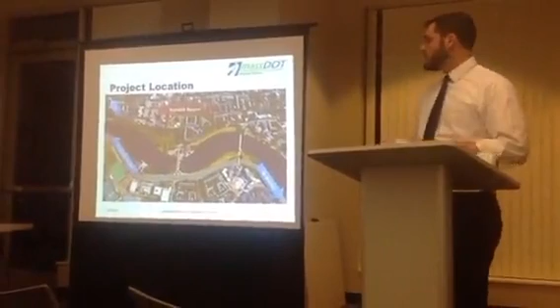So, where are we? This is an aerial view of the project location. This is Soldiers Field Road on the Boston side, and of course here's Harvard Square over in Cambridge. And this is the Anderson Memorial Bridge, which I'm sure you're all uncomfortably familiar with, is under construction today, and it seems like it has been for quite some time.

Just as a point of clarity, when we first began looking at this, the feasibility of an underpass at Anderson, we started doing it actually back in 2010 as part of the rehabilitation project. At that time, we determined that based on the extended environmental and historic review periods associated with modifying our rehabilitation plan, we deferred an underpass or a boardwalk alternative to the future. And that's where we are. That's why we're here today.

This is the future, as it were. And I remember, I'm sure all of you saw on your Facebook feeds yesterday, the Back to the Future frenzy. Yesterday was the day that they went to, and it's quite a different future than I think Hollywood envisioned. That was driving me nuts. Don't put that one in the minutes.

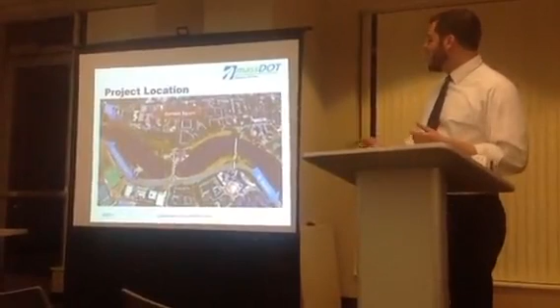A little older now. So you know, this is to Watertown, this is to Boston, Soldiers Field Road, and what we're talking about is separating by building a spur path that would make it so that bicyclists and pedestrians wouldn't have to cross at grade at the North Harvard Street intersection here, and you'll see a whole lot more detail about that.

We're evaluating a set of alternatives for separating what currently exists and what we have proposed under the rehabilitation project, to remove the vehicular and bicycle/pedestrian interaction by putting bicyclists and pedestrians on the spur path below grade, much closer to the river.

In doing this, we're hoping to enhance the recreational use of the Charles River Reservation, better accommodate bicyclists and pedestrians, and provide an uninterrupted path facility at this particular location, and address the safety, accessibility, and congestion concerns that we've been hearing from path users for years, ever since we kicked off the Anderson Rehabilitation Project's development.

We're doing that by evaluating 3 alternatives. We'll discuss—Paul will get into a fairly rigorous description of them later. We'll select the preferred alternative and advance that into our historic consultation process under the State Historic Preservation Law with the Mass Historic Commission, and initiate other environmental permitting requirements as determined by which alternative we select, and then advance through preliminary design.

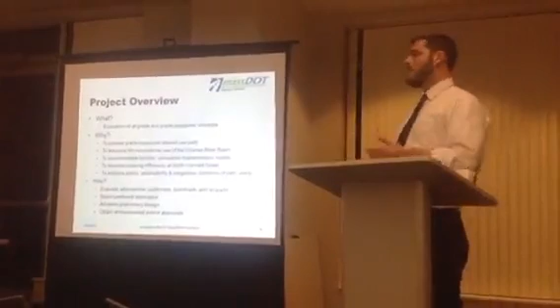Ultimately, the project would get to a preliminary design and then a final design, and then we'd seek funding for construction if that is the ultimate outcome. At this time, I'll be clear, that outcome is not necessarily set in stone. So right now we're really at a preliminary planning phase.

We're looking at the feasibility of two grade-separated alternatives. We're looking at how those compare to the future existing condition associated with the improvements that we propose as part of the rehabilitation project. Like I said, we'll select the preferred alternative and then advance it later. But tonight we just want to have that initial preliminary planning level discussion.

There's been a huge amount of interest in providing a grade separated facility, most notably in the form of an underpass or a tunnel through the bridge structure. This is something we've heard about for years from many organizations in the metro area. Most notably, the Charles River Conservancy has been advocating for this for many years, along with a coalition of other groups, local stakeholders, and residents interested in MassDOT looking at this. This is really just beginning again tonight.

We looked at this in 2010 as part of the Anderson project's development, and we dismissed it then as a matter of chronology and funding. We didn't want to jeopardize the full larger rehabilitation project with this proposal. Now that we've been able to separate those two, we have a little more time and comfort to take a second look at it.

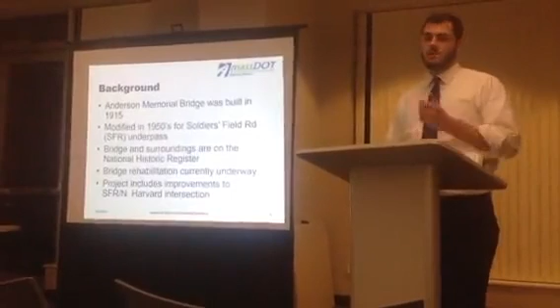The Anderson Bridge is a historic bridge, built in 1915. It was modified in the 50s to accommodate the construction of Soldiers Field Road and the Soldiers Field Road underpass. The bridge and the entire Charles River Basin are a National Register Historic District, and the bridge is a contributing element to that district. Several of the bridges that cross the Charles are architecturally significant, and we're taking a development approach that is trying to be as sensitive as possible to that fact.

As I said earlier, the rehabilitation is currently underway. We expect that to conclude next summer. The rehabilitation project did include a number of improvements to the intersection at Soldiers Field Road and North Harvard.

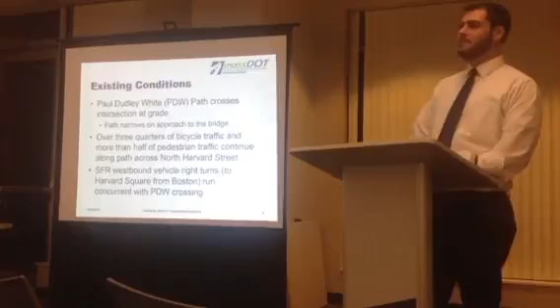Obviously, the Paul Dudley White path crosses the intersection at grade today in a very chaotic construction condition. Beth Studmeyer and I rode over here from MassDOT, and it was a little hairy out there at rush hour, I'll admit. We know the path narrows on the approach to the bridge, and one of the things you'll see in some of the later slides is that the rehabilitation project did what it could to eliminate some of the right turning vehicle issues and widen the sidewalk to provide a lot more space. But one of the things we're looking at is, did that go far enough? You'll see our alternatives may help alleviate some of those congestion issues at the at-grade intersection.

One of the things we've observed by going out and conducting bicycle and pedestrian counts is that about three-quarters of the bicycle traffic continues along the bike path on the reservation, and more than half of the pedestrian traffic as well continues along the path. The rest are turning either across the bridge or down towards Allston.

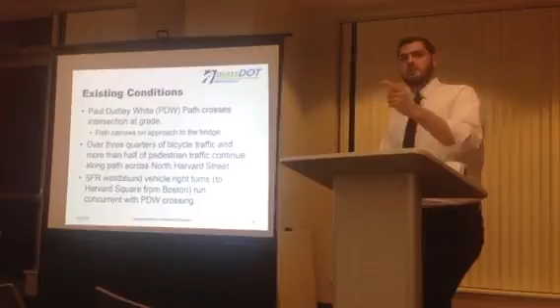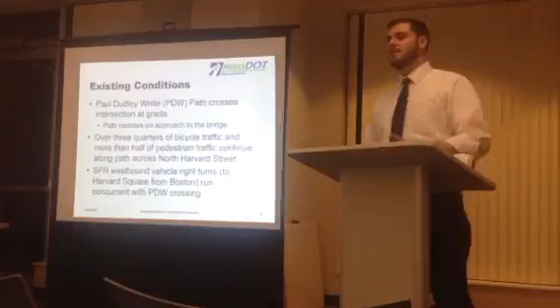The Soldiers Field Road westbound vehicle right turns to Harvard Square coming from Boston are concurrent with the pedestrian crossing or the path crossing. This was an issue identified by many advocates during the rehabilitation project, and I think we did what we could to minimize that impact, but we were asked to go a little further. So these alternatives address some of those issues.

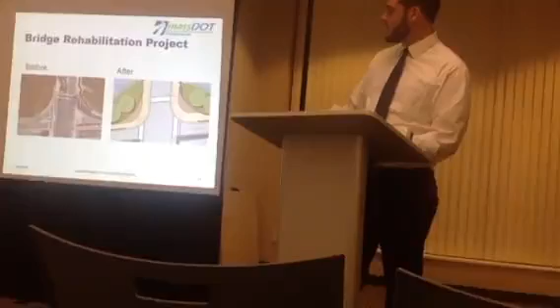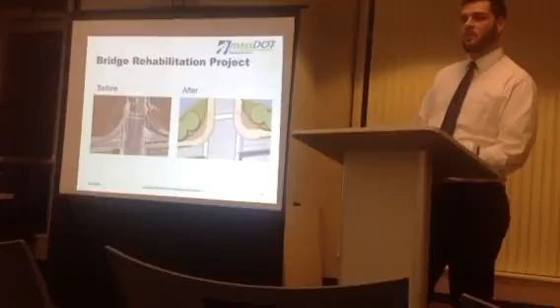In the future, we'll have something that resembles this instead of what it was pre-construction in this aerial, where you had the right slip lane and these delta islands—both approaches actually had right slip lanes. In the future, all of that area has been reclaimed for bicycle and pedestrian use. We had about 5 or 6 feet of sidewalk before; the rehabilitation built condition will be more like 9 to 16 feet in certain areas—a lot more room for folks out there, and much shorter crossing distance.

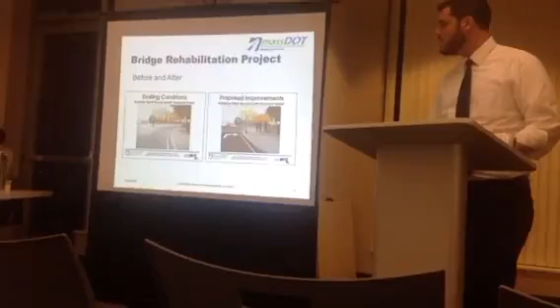Just to remind everybody, these are excerpts from some presentations we gave where we rendered what that would look like. That's the slip lane approaching the intersection from Boston, heading outbound. And this is a rendered view of what that right turn lane would look like with that reclaimed space as sidewalk or multi-use space.

Our goals are to study fully and without bias the provision of a grade separated path facility. We think a successful separated path would address all the bike and ped safety issues associated with bicycle and pedestrian interaction with vehicles at grade, and accommodate increased use. At grade we'll provide a safe crossing, but there's a maximum capacity that could be enhanced by having a separate spur path, improving efficiency overall and meeting public requests we've received for many years through advocacy and local residents asking us to look at more alternatives for bicycle and pedestrian users. Overall, this would enhance recreational use of the path and the Charles River Reservation as a whole. Paul, I'll turn it over to you to give a quick discussion of the alternatives.

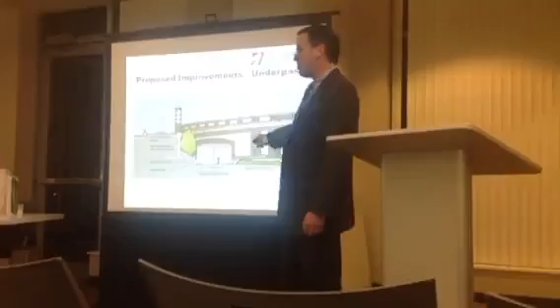Alternative one is an underpass tunnel. The pathway is a spur path that comes off the existing path, goes down towards the river, punches through this wing wall, tunnels underneath North Harvard Street, comes out the other side, and comes back up. There are several retaining walls required. This is an elevation view at the portal to that tunnel, with the existing bridge above, showing this opening here, and the path goes right underneath.

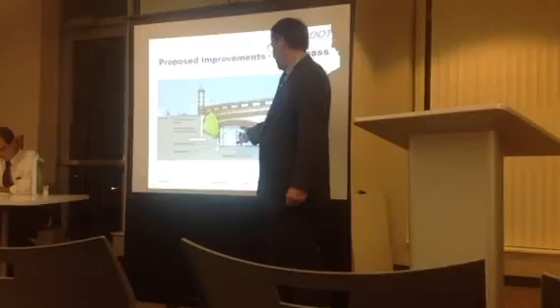A couple of things to point out: there are two large 30-inch diameter MWRA water pipes located a little bit uncomfortably lower than we would like, but they are there. We're also constrained by the water elevation of the river, and we want the path higher than that so it will drain. The result is a height of about 7 foot 8 inches, slightly less than the AASHTO standard of 8 feet, but we've done studies and feel that's sufficient. The tunnel itself is 18 feet wide, as wide as we could make it. There's a bridge abutment here and some constraints on this side too, so we wanted to get good sight distance.

So there are benefits: it addresses bicycle and pedestrian safety concerns and congestion, as Michael mentioned. It really achieves all the goals we mentioned, path connectivity, facilitates commuting, relieves congestion at the intersection, enhances recreational access to the river, and supports healthy transportation.

Some design considerations are obviously the impact to that historic structure, blowing a hole right through the side of that thing that just got rehabbed, but we would address that with sensitive design and architecture. There's also impact to the landscape's character. Right now there's a lot of vegetation here, so from the Cambridge side or from the river, you're now going to see structure instead of vegetation. Granted, that vegetation's kind of scrubby, but it is what it is. It will have an impact.

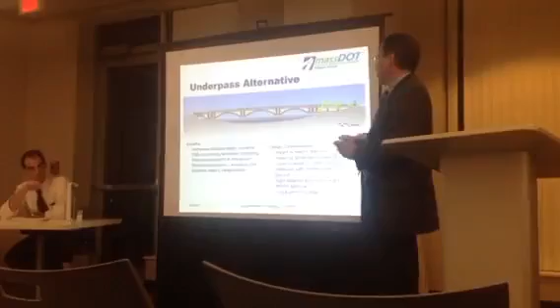Constructability issues need to be considered. Doing this construction and tunneling under an active roadway has its challenges, but we've developed means to do that with shielding and incremental tunneling across that space. This option has some additional pathway intersections here and here that don't currently exist. There's potential for conflict there, but obviously much less impact than conflicts with vehicles. Security is definitely an issue we have to be mindful of. This is a secluded spot, so there has to be plenty of lighting, and again the wide tunnel and maximized sight distances should help mitigate that.

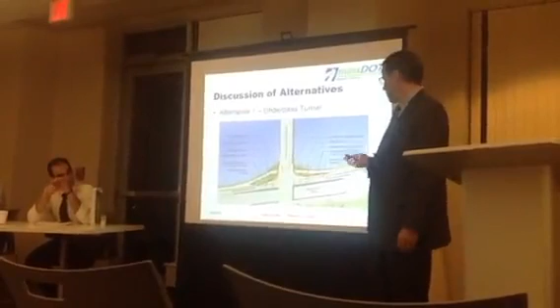The tunnel height I mentioned, and the sight distance is a challenge. Within that site, there's not a lot you can do. We're trying to get as close as we can to the river without actually going into it, along with the permitting impacts and associated costs and schedule. We need MWRA's approval for locating a tunnel right underneath their two pipes. We've had meetings with them and came up with design detailing to fully support their pipes, and they are supportive of that, so to speak. There's one local permit, relatively easy in terms of environmental permitting.

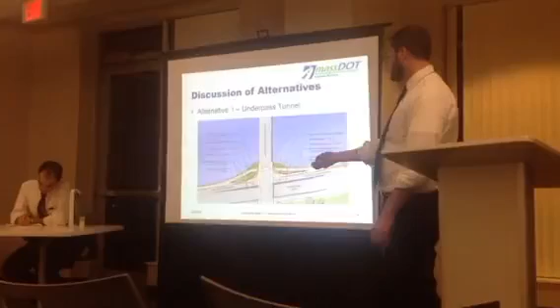Paul, if I may interrupt just quickly, I'm sorry to do this. One of the points Paul was making is about the sight distance, most notably on the inbound, downriver movement. I always get confused about east, west, north, south here, so I try to avoid those directions. But when you're going inbound, downstream, making this movement, it's the curve of the path that we're concerned about in terms of sight distance.

We've done the best that we can to maximize sight distance for when you're on a bicycle going 15 to 18 miles an hour, maybe even a little faster for some users, especially since we're talking about coming from up here and going down here. It's a maximum grade of about 5%, so it's not steep, but it's not flat either.

One of the concerns folks have raised internally at MassDOT, and among the team as a whole, comes from experience MassDOT and DCR have had with other tunnels on bike path facilities, where inadequate sight distance gives rise to a significant number of collisions and injuries. Two notable examples: one is in Eastham on the Cape Cod Rail Trail, where the approaches for the bike path and the tunnel are very, very skewed.

So you have users making a very sharp turn. The other is the Norwottuck Rail Trail in Hadley, which crosses under Route 9. It's a major regional connection for non-motorized users between Amherst, where UMass and other colleges are, and Northampton. There's major regional movement and heavy use on that trail. It's very successful, and in partnership with DCR we just recently finished a rehabilitation project.

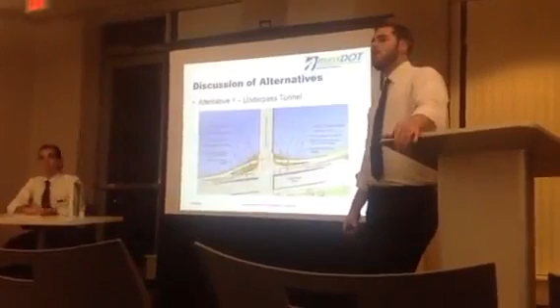And we've been very sensitive— A bit more than that. A bit more? Okay, yeah, good. We've been very sensitive to that concern, not replicating issues we've seen in other locations, so I just want to point that out. We're still working on evaluating whether or not that's as serious an issue as it could be, but we're trying not to overlook it, being sensitive to the fact that all it takes is one user going too fast, not paying attention, to cause a real problem. One injury is too many. So anyway, sorry to interrupt your flow, Paul, but I just wanted to clarify.

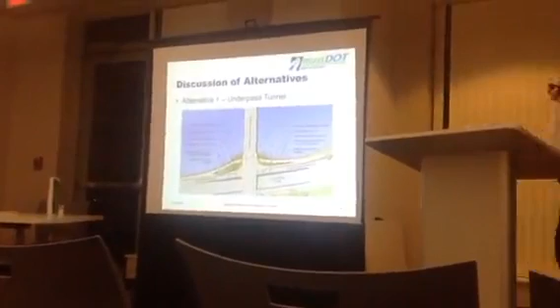That's good, that's important. We've got the right people on our team to address that. Peter Furth is here, a bicycle path expert from Northeastern University. If there are any other comments or questions about that, Peter can speak with us about it.

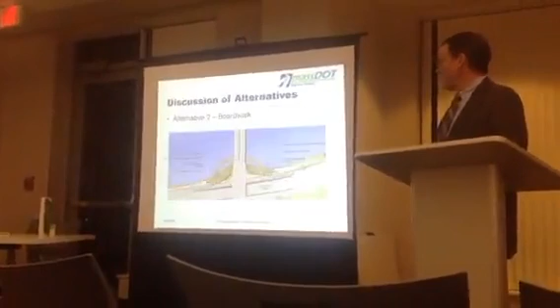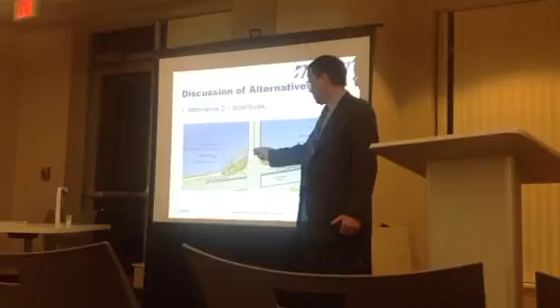The second alternative is the boardwalk. In this alternative, the path comes down similar to the first alternative, but then veers out over a pile-supported timber structure, goes under the first arch, and comes back out and returns up to grade. This is an elevation view of that.

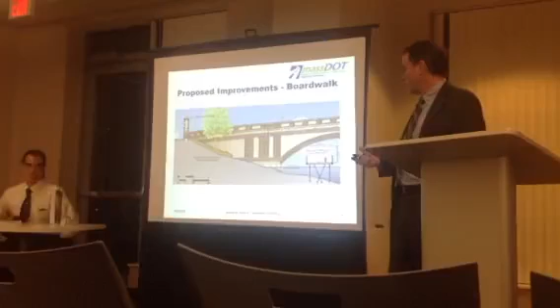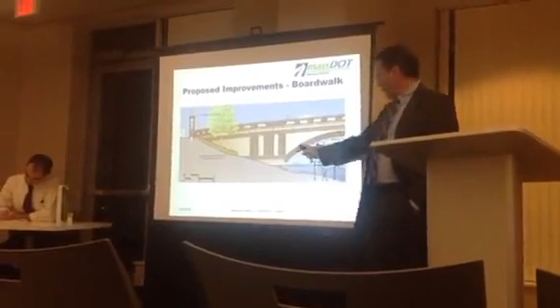Obvious impacts to river use, significant. Speaking with the boating community, the crew shells basically cannot use this arch — there isn't enough room. We have some other figures that we can show you, but there just isn't enough room to get past that, given how many rowers are out there. So there is that impact. This is located as far in that direction as we can get while maintaining an 8-foot clearance envelope.

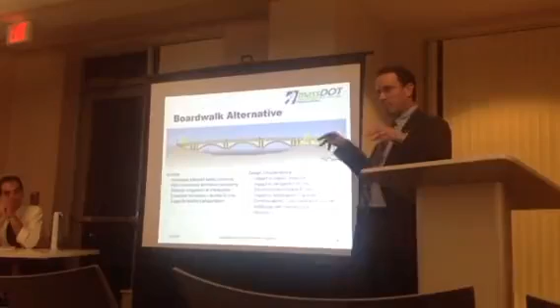Benefits are pretty much all the same as the underpass — it removes the conflicts, provides path connectivity, and so forth. Design considerations: there are impacts to this historic resource in terms of visual impact. There are no permanent changes to the bridge at all, but there are impacts to the area. There are obvious significant impacts to navigability of the river, and environmental impacts to the river and river bottom from piles going down into the water, and so forth. Similar impact to landscaping.

Constructability: this would be constructed with helical piles in the river. Can be done, but somewhat difficult. Same additional path intersections, and pretty much the same security concerns of being in a secluded area.

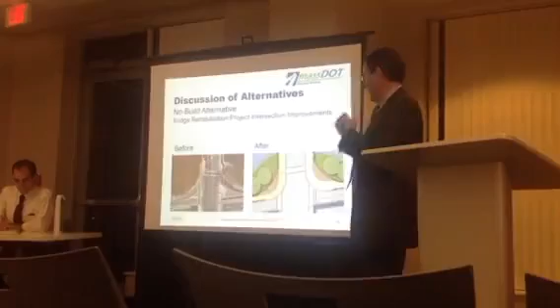Okay, then the third alternative is the no-build alternative, which is actually a bit of a misnomer. This is basically the alternative that will result after the Anderson Bridge reconstruction is completed. Michael pointed out the before and afters on that, but here's another view from above.

This is prior to construction. You had a slip lane here and a triangle here, and now a lot of that area is filled in. So pedestrians are getting much closer, with a shorter travel distance, and you don't have the potential impacts from that slip lane. The benefits are obvious: no cost, no permitting, no environmental impact.

No navigability impacts. Design considerations do not address the community request for uninterrupted path connectivity, and definitely do not achieve the goals mentioned before, as well as the other two alternatives. The potential bicycle and pedestrian conflicts with vehicles remain, and congestion at the crossing for pathway users persists.

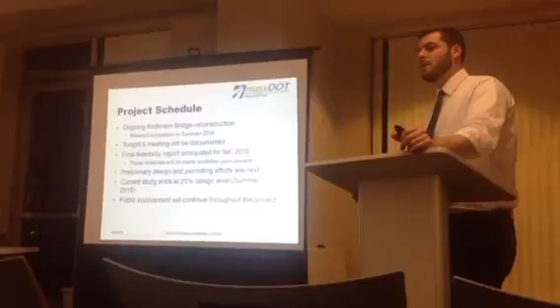So those are the alternatives. Thank you, Paul. I'll point out something Paul didn't mention: the reason why we looked at two grade-separated alternatives comes from a historical fact. When conducting the rehabilitation project, we were able to avoid an adverse impact on the historic resource through very context-sensitive rehabilitation, where we essentially replicated the architectural facade of the Anderson Bridge.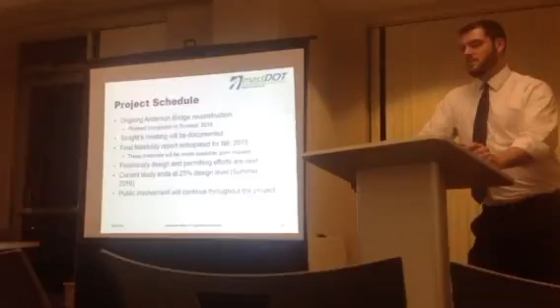We had sent the previous feasibility study to the Mass Historic Commission, and they asked us to look at a boardwalk alternative at that time, and we did. Mostly, as Paul mentioned, it's a reversible effect and the less impactful alternative. That's one of the big reasons why we were looking at it.

Just evaluating its overall engineering feasibility, which, as Paul mentioned, driving helical piles under a bridge arch is challenging. There are manual methodologies that make it so you're not driving with a pile driver - you're actually hand-turning these things in. That's why they're called helicals. You can just spin them into the ground essentially.

They're a structural technique we've applied in a couple other path systems. A very successful path we collaborated and partnered on with DCR at the Alewife Brook, which we funded under the Recovery Act program, has been a very successful project. This is a much larger structure, and I think a structure of this scale is a little untested with that technology, but like Paul said, it's not necessarily not doable.

It's really more about balancing the overall impact on the historic resource with full navigation use of the river, and impacts to the river itself as a natural resource. That's just a little background on that.

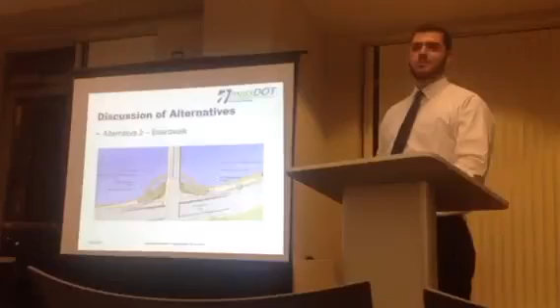But I don't want to overstate - hang on everyone, one second, I want to answer your second question. We don't necessarily have counts of... we have counts of bike and pedestrian users and vehicle counts, but we have not counted crew boats yet. So that'd be a new one for MassDOT, I think.

I got a project out on Route 9, and we got a comment at a public information meeting we gave, and this was a new one: snowmobiles crossing the road. So we're gonna take snowmobile counts. This is pretty neat.

But Beth, do you have something to add? Just to put it in perspective, we have a lot of engineers at DOT who are used to reviewing projects based on specific criteria and design requirements. This is an area where there are recommendations for sight stopping distance, but they're not as comfortable making decisions about projects when there's nothing specific for them to point to about safety and risk. Also, with no disrespect to Peter, we have some skin in the game - this is going to be our underpass, and we'll be responsible for what comes out of it. So as we're talking to our colleagues about this, we need to keep in mind their perspective and how they're viewing it on behalf of our agency.

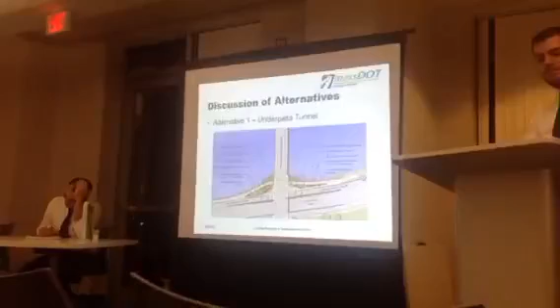Dan, I want to add, I think Peter's making a really good case for passing through the tunnel, but to Paul's point about the intersections, could you back up to alternative 1? I think something that might be helpful in the next rendition is a circulation map of all the possible moves a bike or pedestrian could make, either coming straight across, or if I'm biking westbound and someone else is using the underpass eastbound, has anybody thought about who has the right of way? Under AASHTO guidelines and all the standards, what are the right-of-way movements at those intersections? That's really important, because we'd have to educate users about those right of ways so they know how to behave when potential conflicts happen.

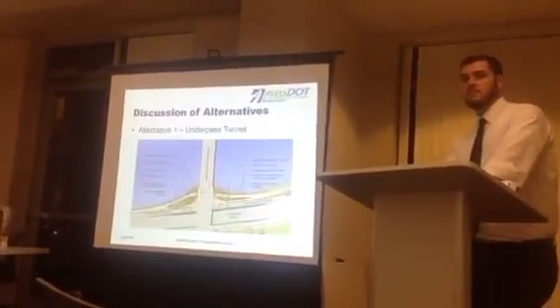So no user counts, but it sounds like qualitatively, the rowing community and recreational use of the river is pretty significant. And regardless if there were only 10 users, that's still the use that's provided for today, and it may not be. It's not quite the same as some of the transportation decision-making choices we make based on the number of cars or bicyclists, allocating this much space for this or that. It's kind of a different animal.

There are 2 other arches that could go up. Do you think there's 1/10 as many rowers as bicyclists going under there? I think that's an apples and oranges kind of conversation. I don't think it's fair to say we can take space from the rowers because there aren't as many. It's just not an equivalent. I just wondered if it could count.

Isn't that also used for Head of the Charles? Yes, of course, there are major events here. One other thing is the middle arch is used for power boats, and the 2 side arches are used for... that's not at all the case. The rowers have their own maps of which arches are used at which times, and they change in early October because of people practicing for Head of the Charles, and change again after Thanksgiving. So all 3 arches get used, and putting the boardwalk there would probably preclude the Head of the Charles from taking place on the Charles River. That's a concern we have.

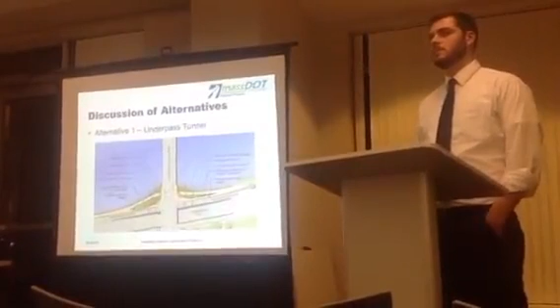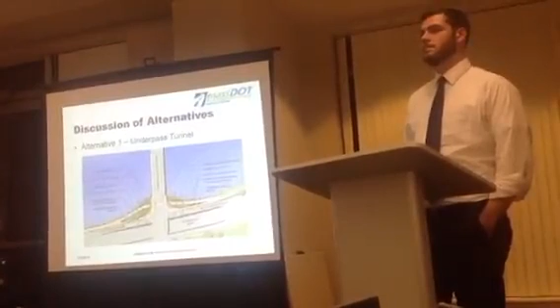And speaking of the Head of the Charles, I was at that bridge, at that intersection last weekend. We were all stopped—pedestrians were stopped, bicycles were jostled, cars were jammed. It took 20 minutes for me to move half a mile out of Cambridge in a car. The Head of the Charles isn't the only big annual special event we have—these are very regular occasions in this area, and I don't think they have minimal impact on quality of life.

So I beg you, we need an underpass, and we need it sooner rather than later. And if somebody's going to say that it would preclude us from having the Head of the Charles, that's no longer a consideration.

Excellent comments. I don't even have a response, Senator. Yeah, I would ask a couple of questions.

Just to put it in context, maybe you guys can help me fill out a couple of details here. Ultimately, this has its greatest benefit when all three bridges are done. I mean, the worst crossing by far is the River Street crossing, where you really are taking your life in your hands as a cyclist trying to get across on the Boston side of the river.

My understanding is that the Accelerated Bridge Program, which funded this project, is now essentially tapped out as a funding source. So is there any identified funding source at this point to address the Western Avenue and River Street bridges? Not to my knowledge.

Yeah, you guys are doing the rehab on River and Western? Yeah, it's been awarded. You're talking about the crosswalk project, Rob Antico's project? Those are the interim improvements. So there is a project you might want to comment on those. Yes, sure. Thank you, Dan.

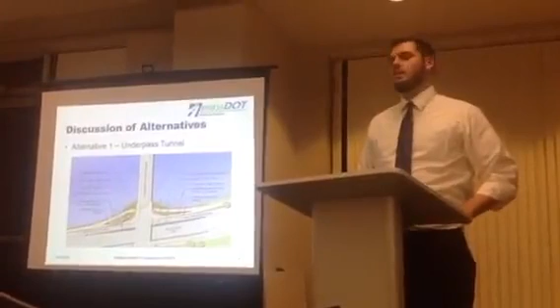Sure, let me fully address your comment, Senator. At the time, about three years ago, the Accelerated Bridge Program capital funds, the money left to be dedicated for projects that we would advertise for construction and ultimate contractor procurement and build, was starting to run out. We planned a number of projects. Several of them were the ones that we inherited from DCR when transportation reform handed us ownership and care and control of those bridges.

But most notably, there were some really large ones, the Woods Memorial Bridge in Medford and Everett, where we are building an underpass, a boardwalk. Just for anyone out there that thinks MassDOT and DCR doesn't like underpasses or boardwalks from previous public meetings, Dan reminds me we put them all over the place.

And again, now we're here tonight. But that program essentially became overspent. What you plan at year one is not what you get at year five. I think the program was very successful on a statewide basis, and that was a good thing. But the River Street and Western Ave bridges were fairly costly.

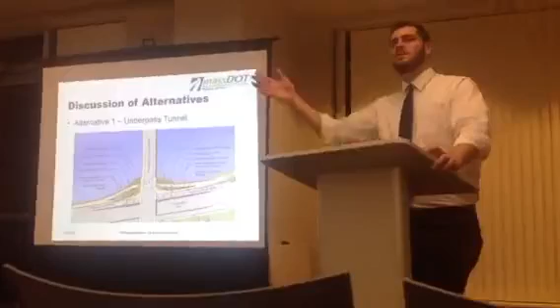The total price tag on those rehabilitations was hovering right around $50 million. Split down the middle, it's about 25 each, similar to the cost of the Anderson rehabilitation. I'm not sure what the final construction bid was, because I kind of get left out of that after we get through design and development. But it was hovering right in that range, about 25, maybe upwards of 30, when you account for all the utility costs. So at this time, there is no funding identified or allocated for River and Western.

And furthermore, this is sort of the low-hanging fruit in terms of the three, in providing an underpass. Is that a statement about it already being partly done, or because the engineering's harder on the other bridges? Yes, because the engineering is a lot harder.

There are seawalls in that area of the Charles, and I don't think there's any one of those crossings on either the Boston or Cambridge side where you have riverbank on both sides. In this case, we have quite a bit of riverbank on both approaches to a potential underpass, and it's a lot easier to do. The seawalls are not in terribly great condition, and they're also part of the historic district, so any impact to those would be another sort of stack on top of the impact to the bridge structure itself in terms of its historic integrity. And we think that's a lot more challenging.

I don't think we've looked at those in the same depth that we have here in Boston, and Anderson on the Boston side. So there was a comment that Dan made that maybe we just want to talk a little bit about what's happening, what interim money is being spent on those intersections.

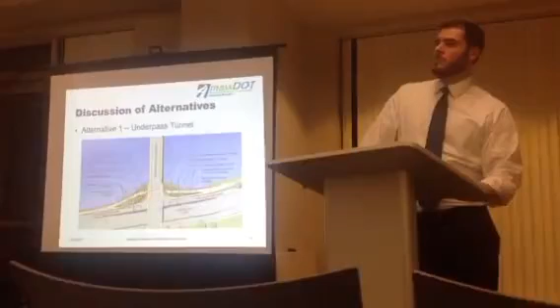When we were undergoing this, and I'd like to focus on Anderson, but I know this is a concern for everybody, about the full length of the path, right? When we were actively working on the River and Western Rehabilitation Project, we had dismissed underpasses because of the engineering feasibility and overall overarching concerns there.

Cost, feasibility in terms of making those connections to the seawalls. It's a much lower dip, so in order to meet accessibility requirements we'd be building a really large path. The security concerns that Paul mentioned associated with the underpass and boardwalk here would be even more significant at River and Western. Paul, or Scott, maybe you're better to answer this.

I mean, this is a couple hundred feet, right? About 250, 300 feet on each side. Yeah, about that. It's hard to see and scale it off to the human level when you're looking at a cartoon plan on a projector screen. But that's a fairly significant amount of infrastructure that, in this case, is connected with the landscape.

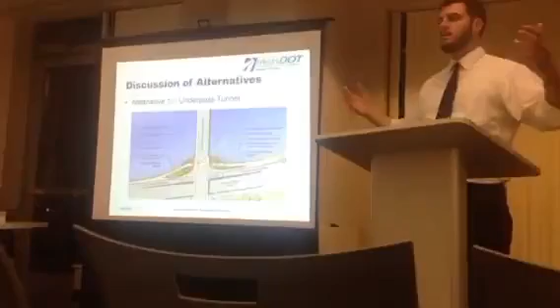At River and Western, that wouldn't be the case. You would have a structure that's just floating in air. I mean, obviously on piles, it's not - we don't have magic in MassDOT yet - but it would be a much different facility than what we're proposing here.

So that's why I refer to this as the low-hanging fruit out of the three, because the Charles River banks are already there for us to build on. There aren't the seawalls, the grade difference isn't nearly as significant, and I think overall this is a much more cost-effective location for an underpass.

Is anybody in the room able to say what is planned at River Street and the status of that short-run project? Dan, it sounds like we were about to award a contract. I believe the contract is awarded. Maybe I'm asking DCR - yeah, that's right.

Well, last I spoke, Rob Antico is, I believe, managing that for DOT. And last I spoke with Rob, he said that they were awarding it, and I think a notice to proceed had gone out. There was some work on Western as well as River in the contract, the last bid set that I saw at least - they were doing improvements to both those intersections, and he thought it might actually get underway this fall, but I haven't seen any activity yet.

Will there be a walk signal at River? Mike, the full project encompassed four bridges. I advanced the design to 100%. It includes rehabilitation of the two large bridges and full replacement of the overpass bridges over Soldiers Field Road.

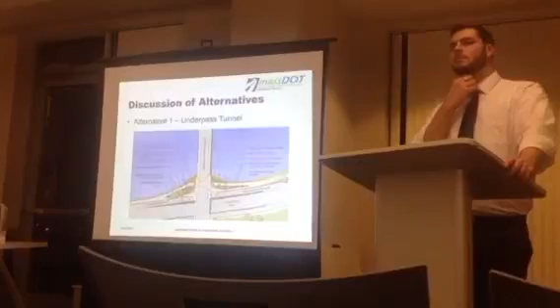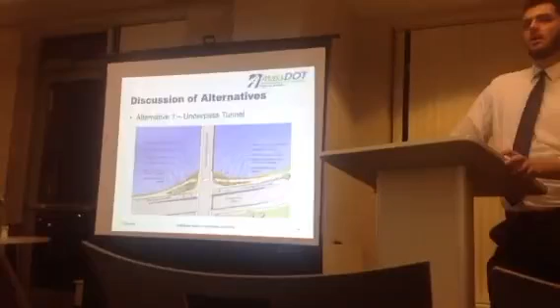So if you're coming up from, let's say, Allston, you're going to turn right because it's easier than turning left to get on, and then under, or vice versa. Well, you probably wouldn't go under—you wouldn't be using the spur. No, I understand what you're saying. Okay, I guess I don't understand. Yeah, so if you're not going to make a left turn onto the path because of, let's say, traffic going from Harvard—do you want me to answer that? Yeah, please, Peter, because I'm confused.

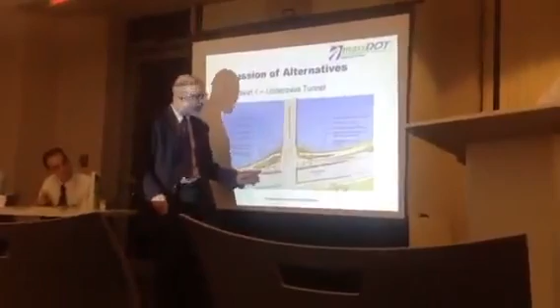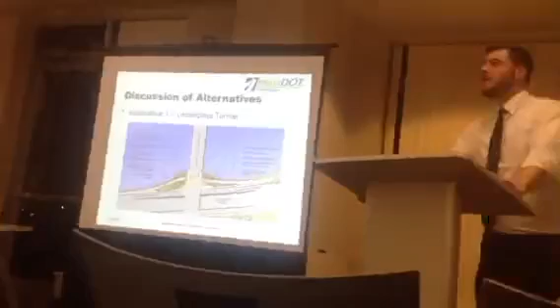Okay, so I think if I understand you right, Barbara, you're talking about somebody who's coming from Allston, and instead of wanting to make a left turn there, which is something they could do, they could do this and then loop around. Or likewise, a person coming along the river who wants to go into Cambridge, instead of going across and turning left, they might go through and then loop back. So these intersections were made so that the total width edge to edge is a width that a bicyclist can do comfortably at low speed. You're going to go real slow, but we actually did some tests where we used plywood walls, moved them further and further out to see at what width a bicyclist could comfortably make a hairpin turn. So we have that width, because there are so many commuting options at this intersection. You'll be able to make those hairpin turns, I apologize, I wasn't clear.

I'm going to take someone on this side of the room because I've been ignoring you guys. Sure. So this is all well and good, but as you mentioned earlier, the Historic Commission gets some degree of say. That's part of why, in redesigning the bridge, you have to keep the original facade.

So there's a federal law that protects National Register historic places, collectively referred to as Section 106 of the National Historic Preservation Act. That applies to projects that have a federal action, either in the form of a permit or aid. In this case, we're kind of unclear where final construction money funding would come from, so we're going to err on the side of state review, which in our world we refer to as Chapter 254, administered by the Mass Historic Commission. What it provides for is a consultation process wherein Mass Historic makes a determination of effect.

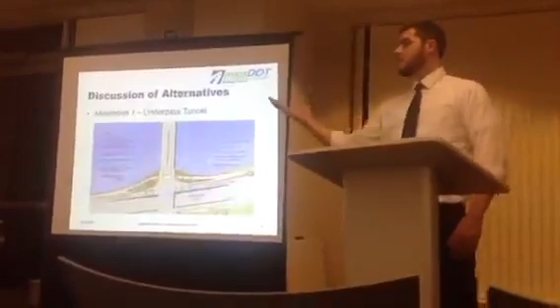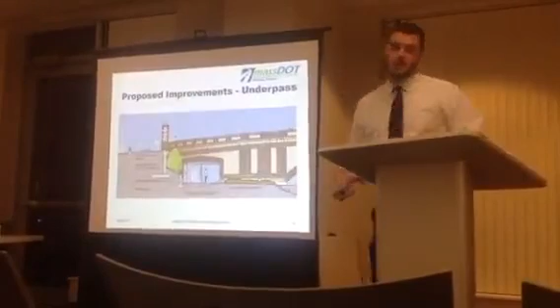Then we go through a conversation about minimizing the adverse effect, or doing the least amount of damage we can. Paul alluded to that when discussing building any of the build alternatives with architectural elements that are most context sensitive to the historic structure itself, trying to replicate some of that architecture, some of the details of the brick facade. You can see we're mimicking the arch that carries it over the river. We've got similar kind of brick details with some of those columnar features. And then we talk about mitigation, and it's a three-step process: avoid, minimize, mitigate.

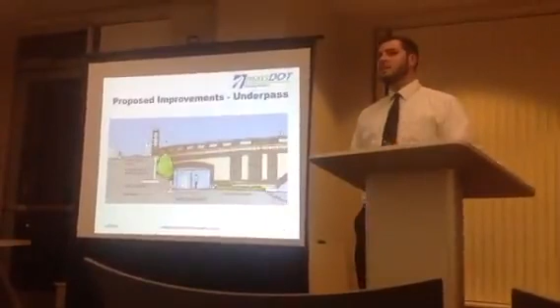MHC asks us to consult. Ultimately, they don't have a veto, they don't have an approval, but it can be a lengthy process. This is why we deferred this during the rehabilitation, because we didn't want to compromise the application of the Accelerated Bridge Program funds. Now that we don't have that looming over us, that scheduled deadline, we were able to take a step back and reevaluate. So no, they don't necessarily veto, they don't approve, but there is a fairly intense and involved process that Jeff and Mary will be conducting in consultation with MHC.

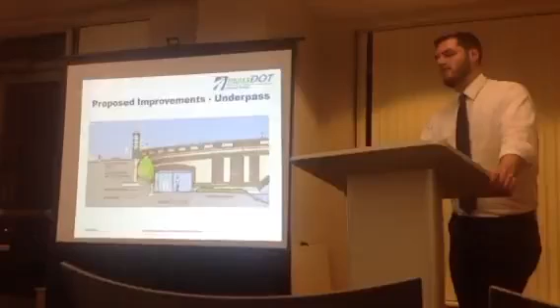Well, besides the fact that we've already invested somewhere along the lines of 25 to 30 million in rehabilitation of the bridge, at a preliminary stage, where we're at now, Paul and his team have estimated about $2.5 million for the boardwalk and $4 million for the underpass. And that's, I think, assuming it's a completely standalone project with none of the efficiencies associated with having done that as part of the underpass built as part of the rehabilitation project. So there were some efficiencies associated with contractor mobilization and some of the landscaping items and things like that, but it's not significant.

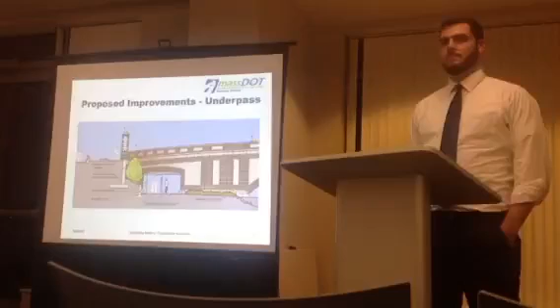Renata: Well, thank you for coming here to make this presentation. I just kind of would like to put things a little bit in historic background. I think we've been discussing underpasses now for about 6 years. And as you mentioned, the underpasses were not part of the original MassDOT proposal to rehabilitate the 3 bridges. And then in July 2014, the Secretary of Transportation said, all right, you're going to investigate underpasses at all 3 bridges at that time. So thank you for moving forward, and I know Secretary Pollack has reinforced that wish that MassDOT explores that, and we're also very grateful that the pipes were moved so that the underpasses could be accommodated.

So I think that's wonderful, and I love the idea that you say this is a totally non-biased presentation. So I hope this is true for all MassDOT staff, and it always is. And everybody involved, because I know we're in Allston. So that is the way. And I think what I hear is that the boardwalk, you just have to go through that exercise, but this is out because of the boating and the impact.

So we're really talking right now about the underpass through the abutment at the Anderson Bridge. That's what we're looking at. I appreciate your very detailed explanation about the role of the Mass Historical Commission, because they can advise, but it's ultimately MassDOT weighing the advantages that will make that decision. I think that is a very helpful analysis.

I hope that the other bridges are not taken out. I think they should go through the same process as this bridge is going through. I realize there are gas issues, steam issues, and MWRA issues, but I think they all need to be looked at, because in a few years there'll be even more bicyclists. So I think that is very important. But I appreciate you putting all these experts together to look at all that.

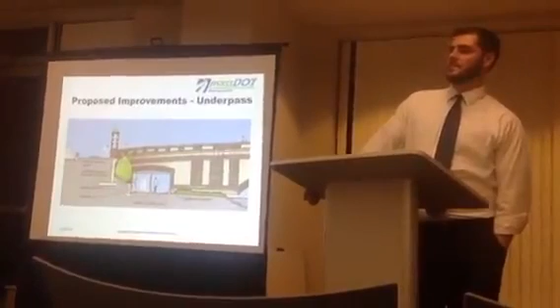First, I'd like to say thanks to MassDOT and particularly the engineers from Gill Associates who really put their minds to trying to make something work here. And I really think it does. That's the exciting thing about it.

I also think that the surface, which I looked at when it was being reworked in preparation for the reconstruction contract, really won't work. Because in fact there are so many right-turning cars at that location that there is never a moment when bicyclists and pedestrians have a clear shot at getting across without going in between cars. And while MassDOT, I know, has got to say is acceptable, it really isn't. And so the need for this underpass is extreme.

That's why I think it's really worth finding the money and going ahead with it as quickly as possible. And I think the design itself has really accomplished quite a miracle in the sense of making it very open, designed so that it's not going to hold water when it rains. If the Charles were to rise that high that it would actually fill this space and the bike path not be usable, it's going to drain right out as soon as the water goes down.

So it's really designed very well. It's not going to be a bathtub. It's going to be visible.

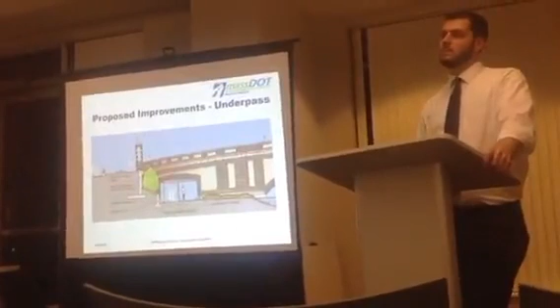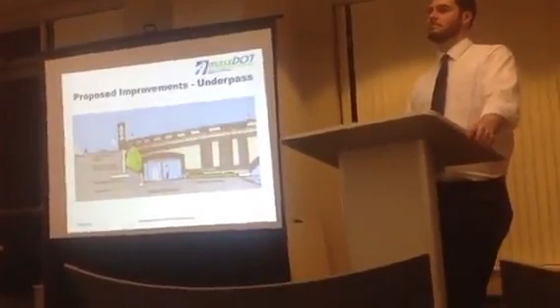But the criteria that we came up with at that time in 1989, as to how far back you would have to be to see under an underpass to be willing to use it in terms of safety, is being met here. So maybe we were right, maybe we were wrong at that moment in time, but I think we really were right, and that this design has achieved enough visibility ahead that it can operate very, very safely.

We've got much more width here, and we've got to still deal with the fact that people are going to have to learn to behave on shared use paths. I was also involved with the Southwest Corridor path, and know that as more and more bicyclists use it, as more and more pedestrians are walking in the park, there are sometimes pedestrians who are in the way, and there are other times when bicyclists decide they're just going to bully their way through very uncomfortably for the folks who are walking or strolling. We can't avoid that here. We're not going to build still another path, but we certainly can expect that by good design, people will learn to try to be conscious of their responsibilities to each other.

So as long as we have eliminated the conflicts with the cars for the people who are going continuous, we will end up with a much better intersection at the top for the people who are going across or for folks who are changing the directions that they're going there. And so ultimately this makes the surface far better than it is today, or will be soon, and makes the continuity work so much better.

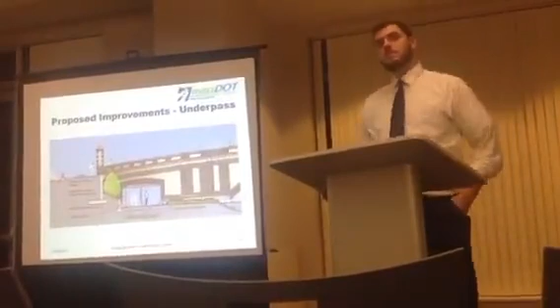My name's Dave. I actually live in Newton and commute in on the bike path into Back Bay, so I come pretty long ways. There are lots of road crossings that are pretty hairy, North Beacon being one, where cars don't think they should stop in crosswalks—and there's no pedestrian signals. But I think this is a great solution to one of the problem areas on that commute. I should also say I'm obviously also a driver, and I also run on the path quite regularly, so I'm multimodal—not quite as multi as these other guys, but pretty close.

The one point I want to make about River Street—and I hate to bring that up again—is that I do know there's a project in process for DOT on the Mass Pike, straightening out the whole curve around the Allston-Brighton toll, which involves redoing the whole surface infrastructure around there. It seems to me there must be some way to mitigate or minimize the car-bike interactions with the current disaster on River Street, where there's no pedestrian signal and you're basically taking your life in your hands every time you cross, because you're crossing where cars are trying to go. That's a great comment to make to the Allston team.

I'm aware of the Allston project. I'm a MassDOT employee, and I think that's a message to send to them, and continue to have that dialogue with the I-90 team, some of whom are at this table.

I'm going to go to the back of the room, Steve, and then we'll come back up front.

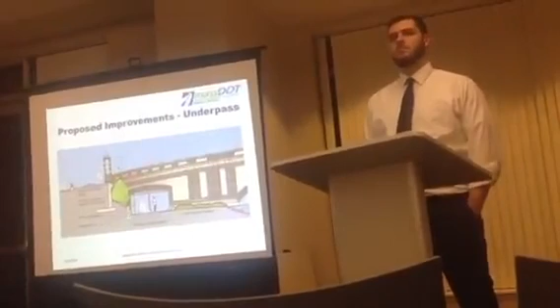You're actually going a little slow to begin with, but the chances of a serious accident on this, well, not zero, is pretty low. If you think about it, it's 18 feet wide, at the top—okay, 18 feet, that's about from the wall to me. And if you can't find a way to get past somebody, you shouldn't be on the bike at all. You probably won't get to the bike.

So I think it's important for us to accept and applaud that you're looking carefully to see that we minimize the risk. And I think it's important for MassDOT, despite its history, to accept that you cannot get rid of all risk, especially in something where we don't yet know all the answers. And if the community thinks it's good, there's a decent chance it is.

Agreed. Thank you, Steve. I'm going to come back to the front. Thank you. My name is Harry Madison. I'm an Allston resident. And just to follow on Steve's point, I think we're talking about the wrong risk.

The risk is someone either walking or trying to bike across the intersection and getting hit by a car and really injured or killed. And that's the real risk that hopefully doesn't happen tonight, doesn't happen ever. But that's the risk we should be really worried about and trying to mitigate.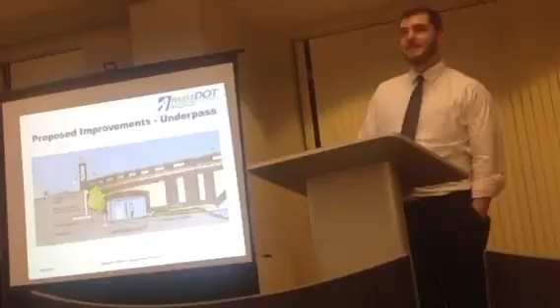And eventually we partnered with DCR, and DCR is a tremendous partner. They really embraced the program - Secretary Pollack was wonderful, doing everything, Secretary Beaton too, and they all came out July 31st. Renata was there. We had just a tremendous launch for the program. So we're very excited - today, all but 2 spaces in the Park and Pedal Lot are full.

Congratulations, that's great news, great news. All right, well, thanks for your input and your comments.

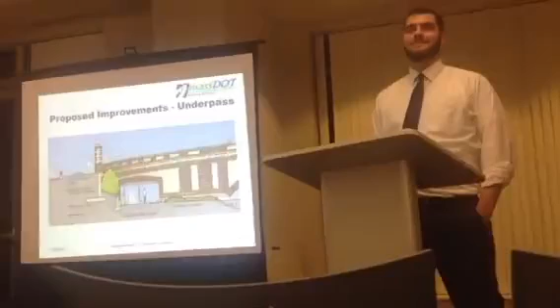David: Two things. The cars on Storrow Drive have underpasses, so we're going to compete with the car having underpasses - this helps. Second thing: there's a user group we haven't mentioned yet today, like all the runners - raise their hands. Wow, they're being a little quiet here, so I want to make sure they're recognized, because runners don't like to stop as much as anyone else, even more than anyone else. So I want to make sure the underpasses serve not only cyclists and pedestrians, but runners. Sorry I lump you guys in with pedestrians all the time.

If I could interrupt real quick, David, one of the things we've integrated into the underpass design is leaving a little space for an engineered goat path. It's not really engineered, it's stone dust. But this way you guys don't have to kill the grass on your own, we'll do it for you.

My name is Art Tischler. I'm a relatively new bicycle commuter from Newton, and I've already had more than my share of interactions with cars on these bridges. So I see this very nice, really lovely proposal appearing here, and I'm just wondering whether I'm likely to live to see it.

Well, unfortunately, I can't say. There's some uncertainty, several realms of it. Right now we have approval from the administration to advance, and we have design money appropriated and allocated with this team to get us to that point. That's what has been allocated. There's uncertainty in how arduous the historic consultation process may be and how much time that may take. It's unclear right now what that effort entails—the consultation is driven by MHC. Like I said, they're not the final arbiter, but they do have control.

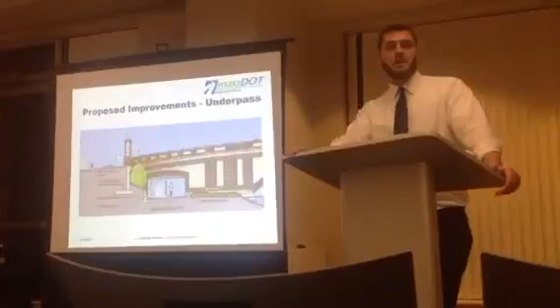So that's the first area of uncertainty. That could be anywhere from 6 months to a year or more. I'm not going to put a handcuff on our architectural historians saying you told us it would take this long—we don't know. That's a best guess as of right now. It could be sooner, to be optimistic.

The other uncertainty is what happens after we get to that preliminary design milestone. The last thing we're scoped to do right now is get through that consultation process and have the design advance somewhere between 0 and 25%, maybe a 10% conceptual phase. We'd present that as part of this overall feasibility report, then continue advancing into preliminary design. Then we'd conduct a design public hearing, as MassDOT does as part of our operating procedures. And then we wait.

We would wait for direction from the administration to continue advancing the design into final design. We would look to the administration to either put this in the list of non-federal aid priorities in the capital improvement program, and have it undergo a rigorous analysis in accordance with our new project selection criteria and prioritization protocol, which hasn't actually started yet, or seek other alternative funding sources.

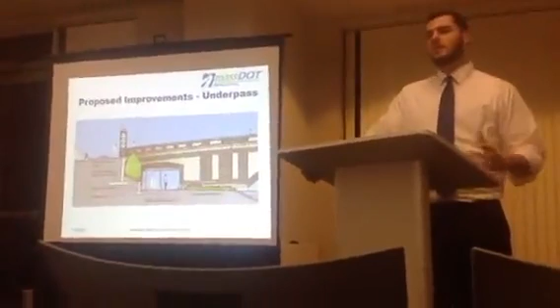Like I said earlier, the underpass represents about a $4 million capital investment. It's not hundreds of millions, nowhere near the investment we're talking about in Allston. So in the scale of major highway capital improvement projects, it's not huge, but it's also $4 million to be spent on a facility that, frankly, MassDOT doesn't operate outside the limits of that bridge. So it's above my pay grade to decide how funding gets allocated.

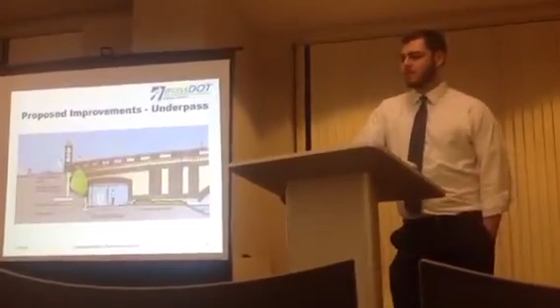I'm doing what I've been tasked to do, which is advance the project to the state we're told. So there's some uncertainty in terms of priority of funding and allocation at the administration level, within the policy framework MassDOT and the state legislature established for project selection criteria. That was something the legislature requested MassDOT prepare and implement in our 2013 Transportation Finance Act, which increased the gas tax by 3 cents and had initial indexing that got rolled back under the ballot initiative last year. So there's a lot of uncertainty.

I don't determine what projects get funded. I oversee a design team that gets us to our milestones. So I can't say yes or no, unfortunately. But I see one optimistic face, or maybe a couple others.

So speaking of funding, have you thought about talking to Harvard? I think Harvard helped somewhat, with a very small amount, with the Weeks footbridge reconstruction recently. That certainly enhances their campus, and this is a huge project that would do that too.

And developing the whole Allston campus seems to me would be a perfect match for what we've been seeing as the transportation future. Rather than running shuttle buses through all our neighborhoods, they should be encouraging bicycle and other pedestrian traffic. And that may be an opportunity, a door to knock on, but again, that's not for me to knock.

Great idea. Dan, do you know anything about the contribution Harvard made to the Weeks rehabilitation? It was probably about 75% DCR and 25% Harvard. That's not a bad idea, certainly not something to be ruled out.

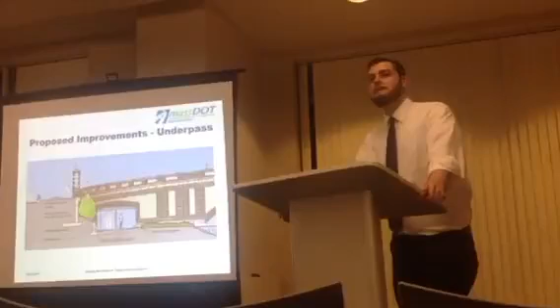How much rent do they pay for the boathouses, Dan? We're still reevaluating those leases and it's been taking too long. We haven't talked to them about it yet. The leases aren't up anytime soon - it's really just that our legal staff have been tasked with reevaluating all of those leases and trying to do fair market appraisals. They come out with some preliminaries, and there's been a lot of pushback.

Allston certainly - the Secretary of State is the person who controls the Historical Commission in Massachusetts. That's where that lives. The Secretary of State in Massachusetts is an Allston resident, as far as I know, and he lives on Great Street. So it would be reaching someone that folks in the community would want to talk to.

I don't want to pin this on MHC, but you use MHC a lot as an excuse for why you can't do this - I've heard this for the last 10 years. No, I never said we couldn't. It's one of the major reasons why this is a problem. It seems like we need to at least address that, help you get past that element. That's a problem I can see from everyone who's talking about it.

I would say it is a procedural challenge. There's no point in addressing MHC at this point until they actually have a project from us - right now they don't have a project. They've given us an opinion based on a previous concept, but we haven't examined all the alternatives they asked us to examine, so the ball's still in our court. There's a public process to their review and consultation process, so that's when you would attend meetings and offer your opinion, perspective, and support for the project.

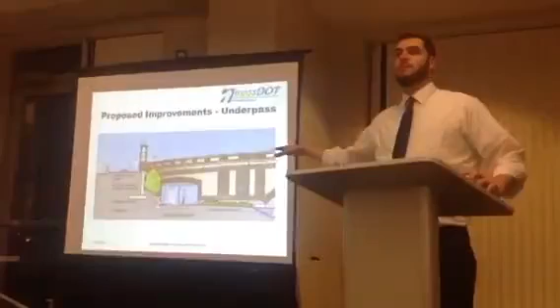What alternatives have you not explored? Hi Kathy - so we haven't presented the boardwalk alternative most specifically, and we have not presented this new updated feasibility study to MHC. We also told MHC that we were making at-grade improvements, and I'm concerned that we aren't letting those at-grade improvements run their course - that we're now saying they're not sufficient, even though we said they were sufficient.

MassDOT - there's no way for us to prove the insufficiency of those at-grade improvements until they're built, because at this point we have told them they should be sufficient. So it's a little awkward to go back to them now. I'm willing to do it, but it's awkward to say we've changed our mind without having seen it through, without showing that the at-grade improvements do not work entirely.

Jeff? I think the concept there of sufficiency is part of the problem.

As some of you know, I directed the re-study for Governor Sargent of controversial expressways and transit lines back in the early 70s. When we were looking at improvements to the MBTA, we sometimes got pushback saying, if you want to do this, are you implying that what we have is not sufficient? The response was obvious: what we're proposing is to improve things. Your surface improvements have improved things, but this would improve them even more. I think that's a construct people really understand. But the idea that sufficiency is a black and white, clear-cut line, I think is a problem in the way this is being thought about.

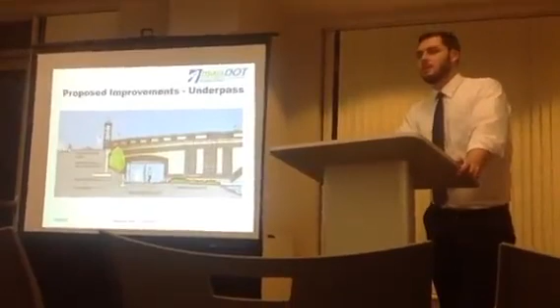Pete Sutton, our statewide bike and ped coordinator, just reminded me that this may be a good opportunity to tell the advocacy community and folks interested in transportation planning and capital improvements to participate in our statewide initiative to seek public input from stakeholders and the public at large about our capital conversations program. Right now we're hosting over a dozen meetings statewide, open house forums to come in, meet with subject matter experts, and submit comments. I went to one at the State Transportation Building—it was a lot of folks you would expect to see, the transportation types. But there's a lot more happening out in the communities, and we're getting a lot of great feedback.

So if you guys aren't able to make it, I have to thank you because you're here at my meeting on Anderson instead of over in Cambridge at that meeting. But that opportunity is multiplicitous—you could go to a meeting and talk to MassDOT staffers, and you could talk to us, because clearly we're doing the thing that most of you are interested in. But you can also submit comments electronically. I'm sure if you just Google Capital Conversations MassDOT, you'll get right to that platform. It's a major initiative to help craft our priorities in programming the future years of our capital improvement program, coupling that with our new project selection advisory council and project selection criteria. I think it'll be a very informed, data-driven approach to transportation and capital improvement planning.

I'm going to go back, unless you have something about this conversation. I could have been at the other one—I could have been at the Cambridge Transportation meeting, and I chose to be here.

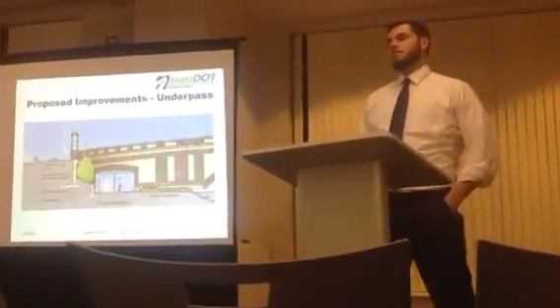I have a question about the sufficiency of accommodating the traffic on these bike paths in terms of walking and biking. I run a store in Belmont, in the Trapelo Road corridor, and I'm involved a little bit with the final striping going on the street, and it seems very overbuilt in many areas to me. The answer I get from town officials in Belmont is, well, it's been designed for projections in 2025, when traffic counts are this fantastic number, supposedly. Do they go into projects like this too? Because the 18-foot wide tunnel seems very adequate for what we might be expecting here.

But the at-grade solution, I think, if the increase in bicycle traffic and walking is increasing anything like it's been in the last 10 years, there's no way the at-grade solution can carry this kind of traffic in 10 years, or even in 2. Because, as somebody said before, on October 27th after dark, there were 25 people trying to cross on bike and foot.

That's a great point. I think it's something that, as Steve Miller was saying, making this point earlier, we're at this pivotal moment in shifting how officials like me and others in this community of practice - engineers and planners - look at transportation improvements and how we're prioritizing and allocating space.

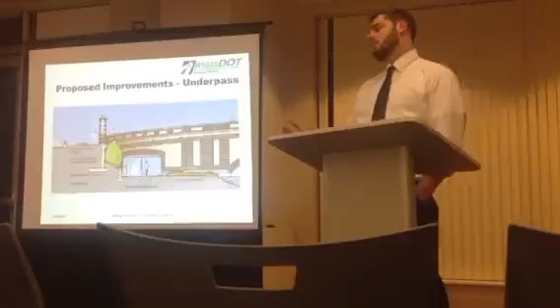We're in a little bit of growing pains, like the crab molting his old shell and growing into the bigger new one or something. I think we've always had really strong, tried and true methods that are nationally syndicated, that we can point to, or you can lean on a regional planning council to give you growth rates.

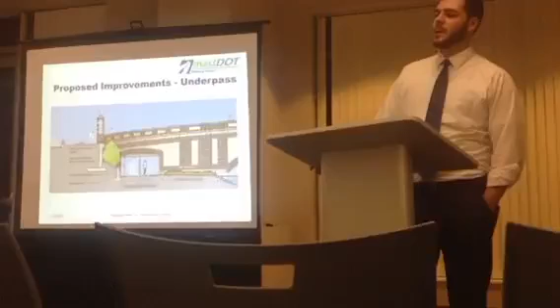We have seen a phenomenal increase in mode share and in non-motorized choices. I think trying to estimate that is difficult, but qualitatively we know it's going to increase. That's a really great point to make about providing additional capacity. That was one of the goals and outcomes we presented tonight - improving the efficiency there. We weren't expressly saying we expect 500 more by 2040 or something - there's not really any way to be that quantitative, but it's in our minds, and I think it's definitely something we need to consider. Maybe 5-10 years from now we'll have better predictive methodologies for understanding how to account for increases in bicycle and pedestrian travel.

It's something I've been advocating on a national level to do research on, because we don't really know. This is something I've been harping on for a couple years now, and some of my colleagues nationally are just tired of it - they're like, oh, we know what you're going to talk about, mode shift again. But we always have this anecdotal, qualitative remark about, oh well, if we build it, they'll come.

In Boston, Cambridge, and now Somerville, non-vehicular infrastructure is an absolute reality. But in the suburbs and exurbs, that's not a commonly held belief—people say you're wasting space and money. Yet in places like Boston and Cambridge with significant non-vehicular mode share, we can't quantify the value of more cyclists, pedestrians, runners, or recreational users. We don't have a good way of predicting that, and nationally it's a void we need to address to justify cost effectiveness and program eligibility for federal funding.

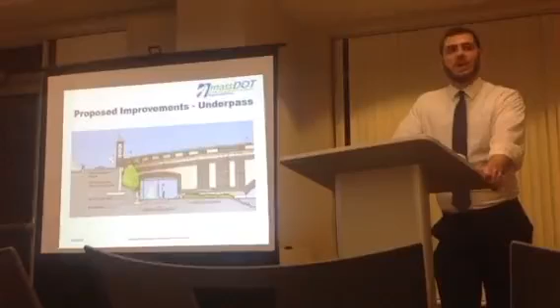I don't have much else to add other than to say thank you—this is amazing. 18 feet is more than I ever thought you could get here, so it's going to be fantastic. In terms of surface improvements, I'm with the City of Boston, and we've made comments over the years on surface improvements. One thing that might be done inexpensively is to revisit the signal timing. Peter Furth has made comments in the city about shorter signal cycles and how that improves things. I'd encourage you to take a look at that as part of the ongoing project, as well as other improvements. It's a great suggestion, especially since it's been several years since we planned and engineered that timing and phasing plan. Thank you, congratulations.

All right, I'll take one more, and then I think we'll close. Hi, my name is Theo Connor. I'm a runner, a cyclist, a civil engineer, and a student right now. I apologize, I missed the presentation earlier, but I worked on a project with the state that went through several rounds of design and could never be built because of funding. Could you talk about the potential costs? I know you're working on design, not funding—that's separate and perhaps out of your control. But how does the budget you're working with feed into the design? The 18 feet looks great, but I wonder if it's a little aggressive and maybe too costly.

Ultimately, I don't think the width of the tunnel really drives the cost too much. I'll let you speak to that. Yeah, I think building a smaller tunnel would be an incremental reduction in cost. Just getting out there and blasting through the tunnel, there's kind of a set cost to do that work, and making it a little smaller, I don't think it would make much difference.